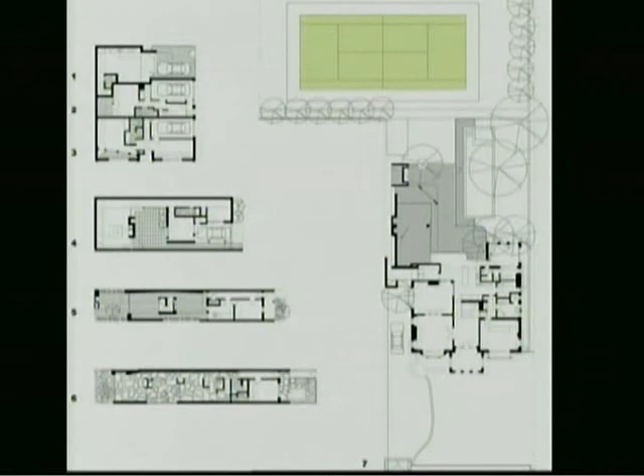The first, in the top left-hand corner, is a townhouse development in Fitzroy that we completed about 7 years back. The second one is a new house in Richmond. This little one down here is an alteration addition to a house in Collingwood, and the bottom one's an alteration addition in North Fitzroy. So I'll talk you through some of these images from these houses.

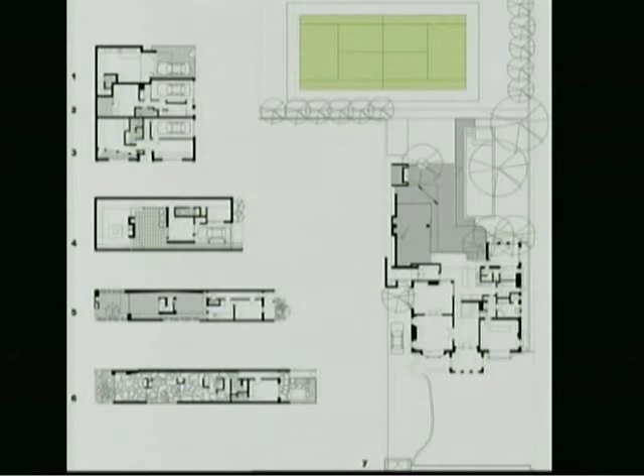And the house on the right, to its credit, is a total recycle of what the clients actually wanted us to pull down. So it had its merits, but you can certainly see the disparity in the size of these sites. So I'll go through these kind of areas which we've explored.

When space is at a premium, equal consideration needs to be given to built form and the area outside of it. How a house relates to its boundaries, neighbours and landscape is an important part of the design process. And this area of landscaping is actually one of the reasons Pat and I set up practice back in '99, because we were very careful of the landscape design component.

Landscape can assist with ventilation, moderate light, and it can provide privacy. It can be of a size you can inhabit, or it may be just a small garden that performs a passive role that's there to be enjoyed from sitting inside. This house in North Fitzroy is on a 160 square metre site and has 3 external spaces designed into it. And this is a little alteration addition to a single-storey workers' cottage.

You can see this area at the front, the 3 gardens through it, and the size again compared to that tennis court. The entry space is designed to conceal a service garden. The second external space is for dining, cooking and play. And the third is a passive planted area off the rear living space, which you can see looking through this zone. The 2 rear spaces are an acoustic buffer between living zones, yet allow for visual access through this small site.

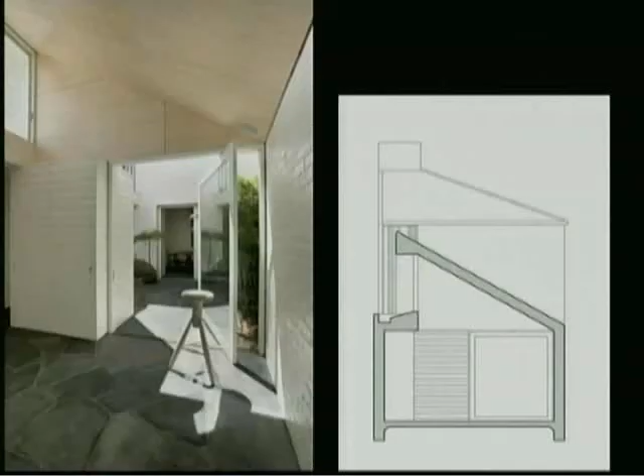The architecture allows for doors to open, thresholds to dissolve when the seasons allow for it. In conjunction with the building section, these small external spaces are an effective way of bringing light into long, narrow and small sites.

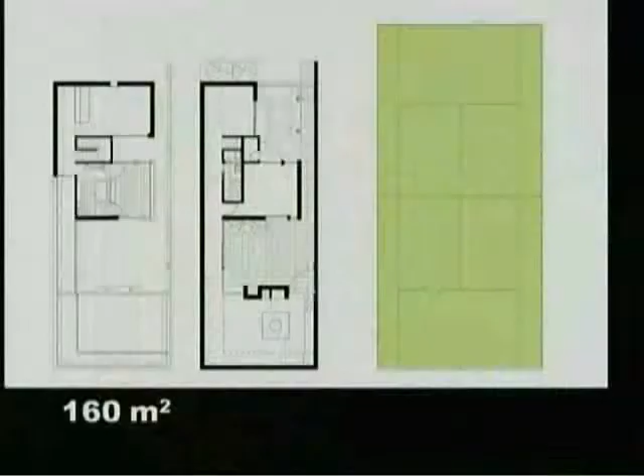Options for habitation, I think, is an important area to discuss. So a flexible floor plan can give those living in the house some choice. It can allow them to adapt their home to their needs. The plans for this 160 square metre sited house in Richmond is a particular favourite in our office. We often come back to it, and we really enjoyed revisiting this house when we were getting this exhibition ready. It's a tiny, tiny little 8 by 20 metre site.

It was initially designed for a couple, and then something went wrong and we found ourselves with just the one client. And he required a building that could still appeal to a broader market, and this is a 3-bedroom plus garage inner city box ticker of a house. As a single inhabitant of this house, he was able to use every space that we designed. Simple changes could see his study and piano room easily convert to the additional bedrooms that the real estate agents seem to require. We've got this little study at the front beside the off-street car parking, and the music room sitting there in the middle, which also has visual access to the rear courtyard and this space where the car is. I'll talk about that a little later.

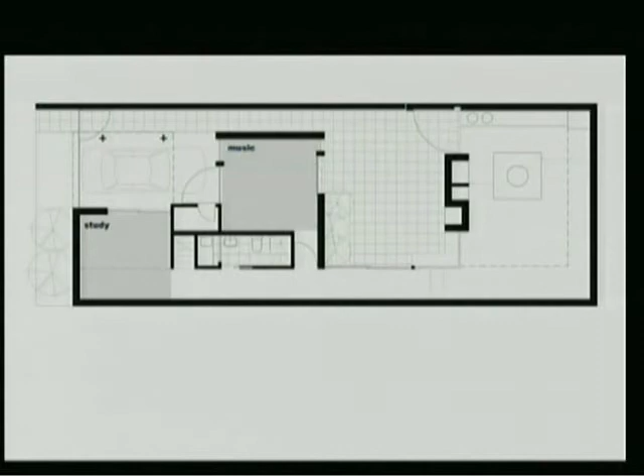So this is a view down that spine through the courtyard back to that area where we had a music room sitting in here, which could be other things as well, and the view from the kitchen back out to that courtyard in the middle. So again, not dissimilar to the house in North Fitzroy with the gardens, views through this very small property. Looking back to the kitchen at the rear of the property and that concealed door that opens up so the kitchen has a direct relationship with that courtyard. Did a lot of jobs, that little courtyard.

Big gestures. Maintaining a handsome scale in the design detail is often best demonstrated in joinery and fenestrations in these small projects. Probably the smallest footprint of the projects that I'll show you today is a 120 square metre site, this little house in Collingwood. I love this client for not wanting to overload this little site. He's a big bloke in a small house, so the design detail had to be of a substantial scale to enable him to feel comfortable in it. So it's basically a two-storey house with an existing room at the front, a kitchen, separated living and dining, and a bedroom, suite and bathroom at the top.

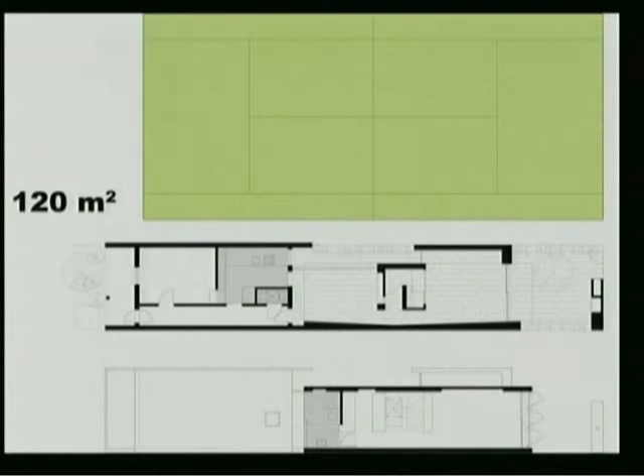The big gesture can also be felt in the selection of robust and enduring materials. Stone floors, painted brickwork, a lined timber ceiling allow a small space to feel generous and are also very forgiving in these high traffic areas, and everything's high traffic when you've got a tiny little site. The bathroom located on the first floor has a similar scaled up gesture with a shower curtain extending the entire width of the property. He certainly wasn't a shy man using that bathroom on the first floor in Collingwood.

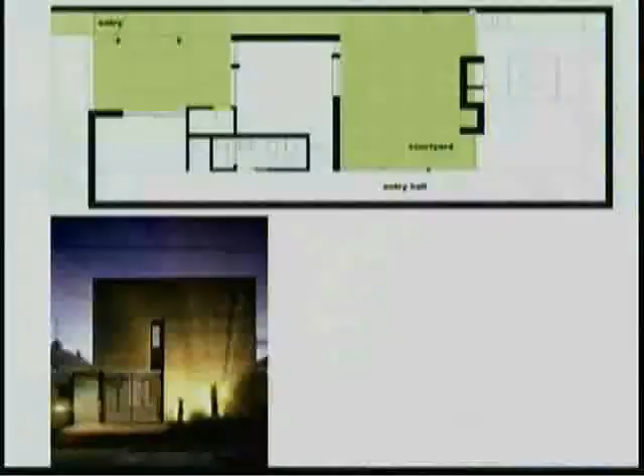Minimising circulation space, I'll get through this. Cutting down on circulation is an obvious space saver. In the Richmond house, the entry was external to the building. Typically you'd knock on the front door and spend all your money on a hallway running down to the back. In the Richmond house, the entry was external and formed part of the landscape. The central courtyard performed many roles, including that of entry.

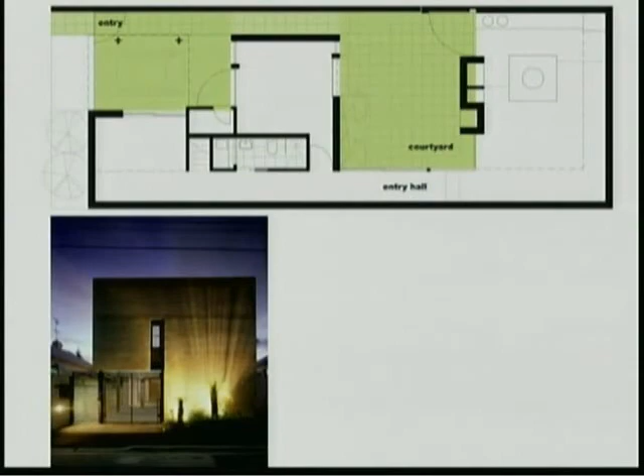The gravel undercover car space could also function as a usable garden if the inhabitants chose not to have a car. That's that little entry from when you walk through the gate at the front. You can see on that bottom shot the gate on the left, integrated with the garage door, and the view down to the kitchen.

Stairs through 3 levels required careful placement. In the middle residence, the straight run of stairs spanned double and triple height voids, where circulation was used to introduce light, air and provide visual access throughout the home.

So, highly programmed service. There are lots of jobs that have to be done in a small house and none of them are particularly glamorous. Clothes need to be washed and dried and rubbish needs to be handled and stored for a week. When dealing with space compromised sites, it's important to consider the location of these very carefully and really from the outset, which I think comes back to the site planning.

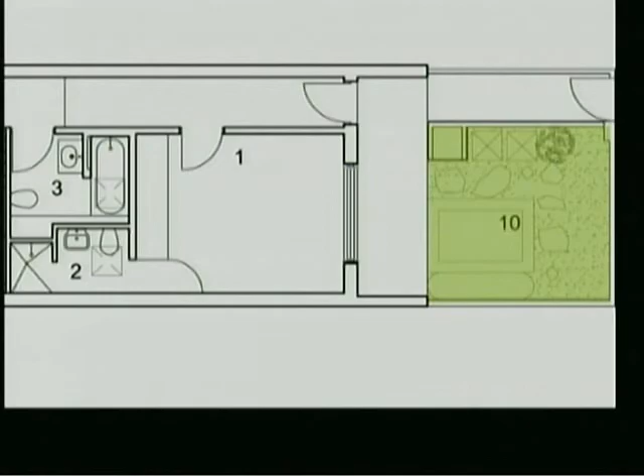The service court located at the front of this house accommodates a vegetable garden, water tanks, rubbish bins, garden tools and bikes, and also has a clothesline. So there's a lot of jobs being done in that small space.

Rationalise your requirements. This is one I feel quite passionate about. We encourage our clients to provide us with a written brief when starting out. This is the time to face the reality of budget and rationalise what is at the core of their requirements of home. Often these lists read like there is a need for a room for every job to be done in the house. Over the years in practice and personally in all of the homes I've lived in, I've enjoyed the inclusion of unprogrammed space, which I've taken to calling a grey room.

This room can be adapted to the changing needs of the occupants or perform a variety of roles in parallel. Often a study, guest room, TV room, children's play, all of these types of rooms can lend themselves to this shared arrangement. This room in a house in Elwood could perform most of these roles for the client. A large sliding door enabled it to open up to the hallway and have access to the garden deck, and the family in this house could adapt this space to their needs.

Maybe it's a low note winding up my talk today with toilets, but this is an area which could do with much rationalising. Most contemporary houses these days have a minimum of 2 toilets, and it's not unusual for there to be more toilets than people in houses. I think we've gone toilet crazy.

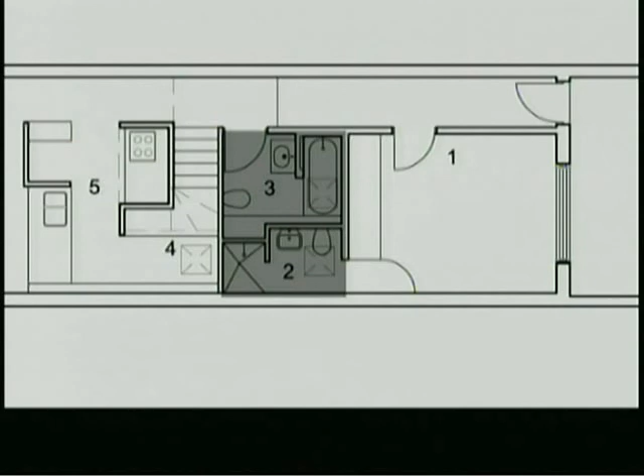A bathroom can double as a powder room with rational planning, and this is just a very simple little plan in that small house in North Fitzroy where they're back to back, but if you tuck a shower or a bath around the corner, it can still work as a powder room. You can pretty easily creep up to 3 or 4. People start to believe they need 3 or 4 toilets. Does every child need their own bathroom? Maybe there are lessons to be learnt in having to share.